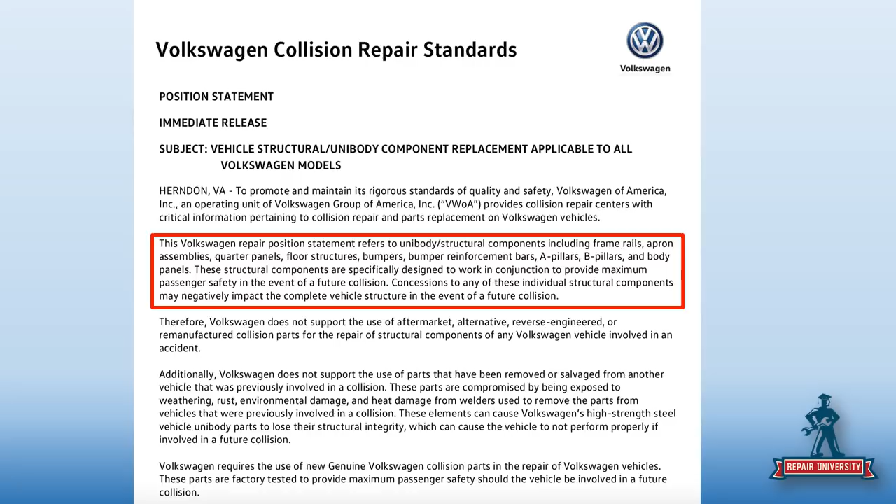These structural components are specifically designed to work in conjunction to provide maximum passenger safety in the event of a future collision. Concessions to any of these individual structural components may negatively impact the complete vehicle structure. But importantly, the bumper works in conjunction with it, and any concession to that can negatively impact the complete vehicle structure in the event of a future collision.

That's a whole mouthful. That sounds like a liability conversation too. It does, yeah. I absolutely love this. And those people that say, well, it's just a quarter panel? No, it's not. Or it's just a bumper? It's just a bumper cover. Yeah, Mark, just a bumper cover, we can do anything we want with that part of the structure of the car.

According to this, this is not only what this repair standard or guideline is for, it's about what parts are critical, and Volkswagen calls them out very specifically. And then this is where it's no used, no aftermarket, no reconditioned. So this is your position statement for that. What I really love about this, and I would hope more OEs begin to get this language, is Volkswagen is very clear that unibody cars' parts are not individual pieces. These companies that reverse engineer a single part, like some company overseas making bumper brackets and claiming they are as safe, it doesn't fit for the way cars are built together and how they interact with each other.

Yep, so great point here. This is a great point to hand to your customers, and it really gets us going. So, unibody alignment and repair. We're going to skip over a couple things. Obviously, we're going to skip full body sectioning.

Well, this is near and dear to my heart, from my previous life working with Hunter and suspensions and all this. Volkswagen suspension, steering, and drive axle components may be constructed of special alloys that include aluminum, nodular iron, and special steel alloys. Volkswagen does not support the use of recycled parts, commonly known as junkyard parts.

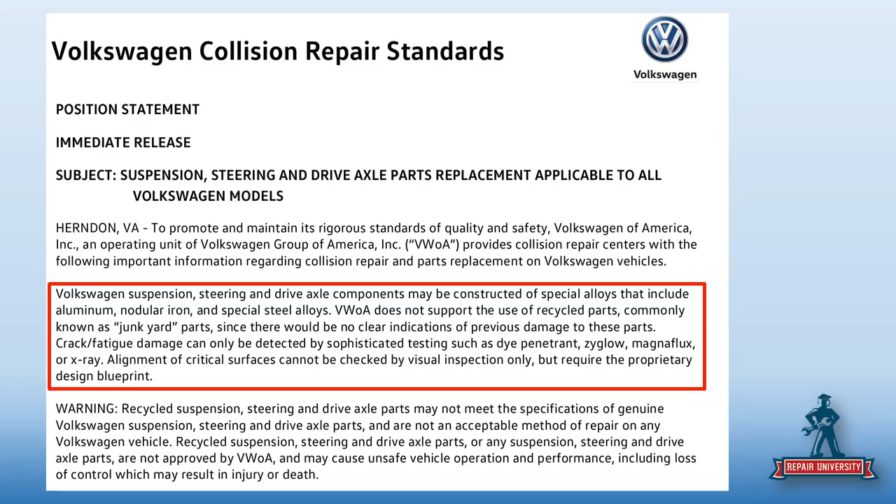It says that since there would be no clear indication of previous damage to these parts, you just don't know what it's got. Crack and fatigue damage can only be detected by sophisticated testing such as dye penetrant, Zyglow, Magnaflux, or X-ray. So what they're really saying is if you're bringing in that used part, we don't know what happened to it, we don't know the history. So we've got to Magnaflux it, X-ray it, just to make sure there's no cracks. Alignment of critical surfaces cannot be checked by visual inspection only, but requires proprietary design blueprints. So if there's any problem with it, and we don't do our due diligence, we don't know what we got. So for that reason, they're just saying don't use them.

If you go back to the February show for Repair University Live, where we did suspension and steering, Larry has a video where the car gets hit in the rear, and you see the front wheel roll forward and then suddenly roll back. You see it hit the curb, not even anywhere close to the impact area, but we know that suspension had a lot of stress applied to it, and the transmission in this case, because it was an all-wheel drive vehicle.

One thing to understand here, it does say dye penetrant, Zyglow, Magnaflux. All three of those are the same. Zyglow is a company, Magnaflux is a company that is also a process. You cannot Magnaflux aluminum components because they're not magnetic. You can only Magnaflux magnetic components. But I can X-ray it. You can X-ray it, yes. And Zyglow and dye penetrant are all dye penetrant, just dyeing something in the area.

Zyglow actually uses a black light. So I just want to make everyone clear, because I hear guys all the time talking about, oh, aluminum parts, I'm going to send it out and get it Magnafluxed. You don't have to send it out, you can do it yourself with 3 different spray cans that you utilize. You cannot send it out and get it tested at a lab for Magnafluxing because it's aluminum. Magnafluxing can only be done through magnetic type testing, so that means it has to be a ferrous type object.

So here's the bottom line for me, the conversation I used to always have, and I'll throw my insurance hat on because I take a lot of criticism, right? You're making more cars total, Kristen, you're anti everything these days. And so here's the part: we never, ever had a discussion in this industry about the use of used airbags, even on the insurer side, right? Do we ever remember? It was really quick if it happened, right, because it was a safety issue. For the love of donuts, I think I'm gonna make a shirt that says just for the love of donuts and wear it around everywhere.

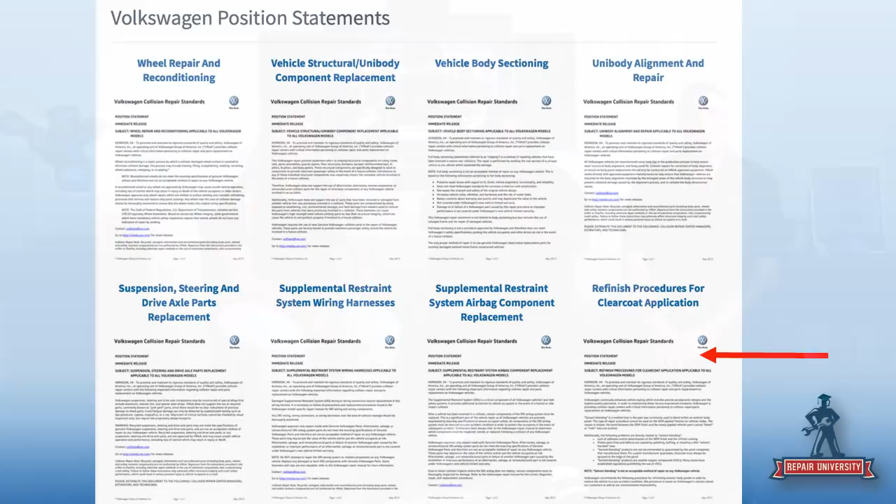So that's really, and kudos, Volkswagen does a great job of explaining this and why it is what it is. It's not just that I want to sell parts, it's that there is damage potential. So let's go on over, because we always know if we go to that airbag section, it tells us not to use these airbags. But let's talk about refinish procedures for clear coat. We have a lot of paint companies that have put out refinish position statements, but here we have an OE that's got a refinish position statement.

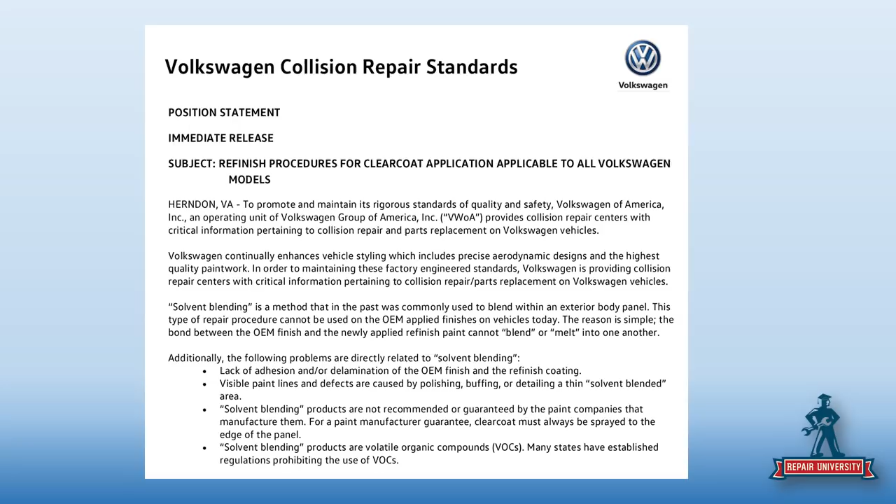The big thing is you've got to go to a panel break. You've got a quarter panel, you go to wherever it breaks, and if there's no roof molding, you might be doing the up and over. So you're painting the quarter panel up into the roof, down to the other quarter panel. They're clear about it, and basically they're saying no solvent blending. Now we have the paint company saying it, but we also have the OE saying it, which is really great. It's a good thing to put together, you can lay those out.

I hear every shop in America right now going, I only want to fix Volkswagens, so I'm going to become a Volkswagen shop. I'll be honest, we do a lot of Volkswagen and Audi that have that up and over, and we've employed them to put a roof molding. We'd rather just take off the doors and the fender and paint the uniside than have to go up and over on every single one of these cars.

We're the shops that are getting paid for every single procedure on it, but it is a little annoying to pay for something you don't have to. When you're certified, you have to take film thickness measurements, reduce enough of the clear coat so when you paint over the top of it, it still comes up relatively the same number of mils so no one can really detect it's been painted. This becomes a real problem - I don't care how much they pay you for it, forget about car totaling, who wants to do that type of work? It's painstaking, and your mistakes are always made on the roof panel or the opposite quarter panel. It's like, oh man, I burnt the paint, or I did this, or I did that.

The average shop that's going up and over - let's just take what an estimating system does, most of them. A blend panel is half the panel paint time, including clear. Well, that's what these fools do. I got it, but that's not your shop, I'm talking about what the industry does. So now we're going to paint the roof for half the panel paint time, the other quarter panel for half the paint time, including clear, and less materials. It's tough to make money doing that.

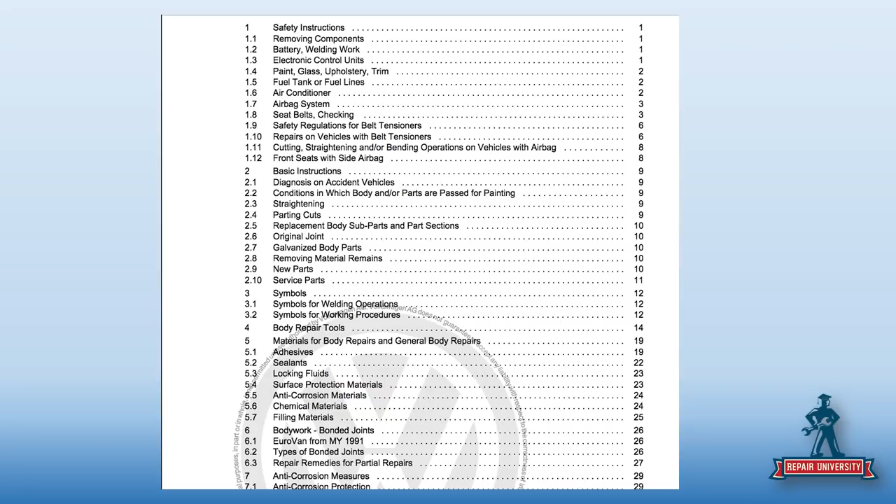Let's get started, because we've got a lot to go through. Here's the table of contents for those 71 pages, and as you can see, it covers a wide variety of content and material. Let's just touch on some of the biggies. Right off the bat, page 1—what's it telling me there in 1.1, Larry?

Before any disassembly work is done, the vehicle should be securely attached to the lift. Wait, so I can't just pull it into the shop, drive it into the corner, and start doing teardown? More than likely, most of the stuff you're going to have to do—even to remove the front bumper fascia or rear bumper fascia—there's plastic covers underneath, so you're going to have to lift the car up at some point.

Obviously, safety precautions. Secure it to a lift, lift it up in the air, drop it down, lift it up, drop it down. It gives you the need to take tires off numerous times to remove splash shields, fenders, or other components. So, is placing...

Wait, no, you're gonna channel Danny. Is placing a vehicle on a lift an included operation? No. No. Well, what would you include it in? Awesome. But I got right here, I haven't even turned to page 1, and I got one thing I should be charging for.

And if it's going to go on and off that lift a couple times, like Larry's analogy on removing a wheel and tire, you may, through the course of the repair, have that wheel and tire off 4 or 5 times. You gotta move that car and get all that charged. So we go down to 1.2.

We're still on page 1, by the way. Mark, what do we have there about batteries and welding work?

So battery and welding work. The first note is about disconnecting the battery to ensure the radio codes. So before disconnecting the battery, Volkswagen's saying write down the radio codes. Well, that's just a good practice. They're saying do it so that we have it back in there for the customer. So that's a customer courtesy.

But then before welding work, always detach both the battery cables, not just the negative, both of them.

Wait, what about my surge protector? No. Can you surge protect? You still got to take the battery out. Well, a surge protector protects the battery, nothing else. We're trying to protect everything else. And by having a surge protector on, you actually leave systems live in the car and you can fry them.

But a lot of technicians say, 'I'll just disconnect the negative battery cable, isolate it, I'm good.' But we got to do both here. And then, if the work produces a spark to be performed in the vicinity of the battery - not next to, in the vicinity - battery's got to come out. So if I'm not welding but doing a little grinding, anything that causes a spark in the area, battery's coming out.

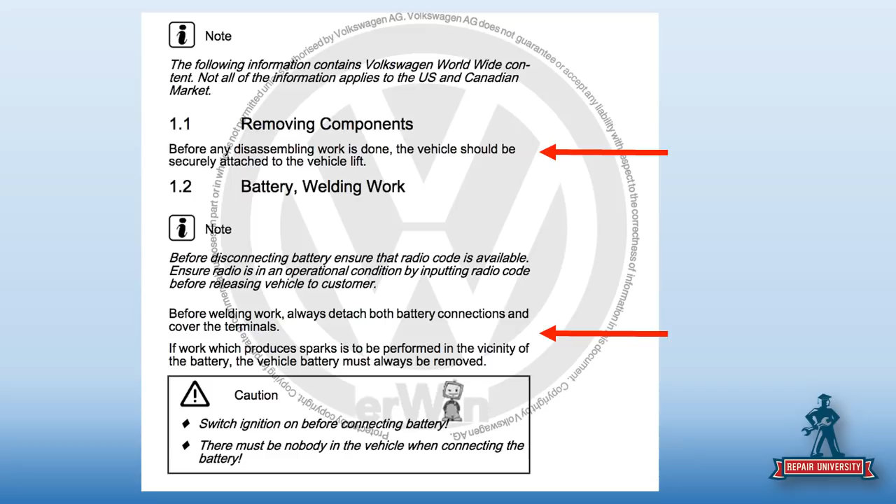That's good to know. But when I go to put the battery back in, what's special about Volkswagen and batteries? So most vehicles say have the ignition off. Volkswagen says turn the ignition on. So switch the ignition on before connecting the battery. And then make sure nobody's in the car, obviously. But that's very different than most of the other manufacturers saying to have the key off.

Yeah. And how would you know all this? If you didn't read the manual. We're just cruising through these 71 pages, and we're on page 1.2 - we've just flipped past the table of contents, and we are there. There's a lot of good information. We've learned a lot just on page 1, yeah, we've learned a lot of what I've done wrong in the last 10 years on page 1.

Now, just like we covered in the blueprinting show on the General Motors vehicle we had in the shop, Volkswagen has some pretty specific requirements around seatbelt testing. And I got a lot of phone calls about that show, by the way. Like, do we really have to do that? Right back to - a lot of manufacturers have that - right here with Volkswagen, 5 pages of seatbelt testing and how to do it. And what does it say about it up there?

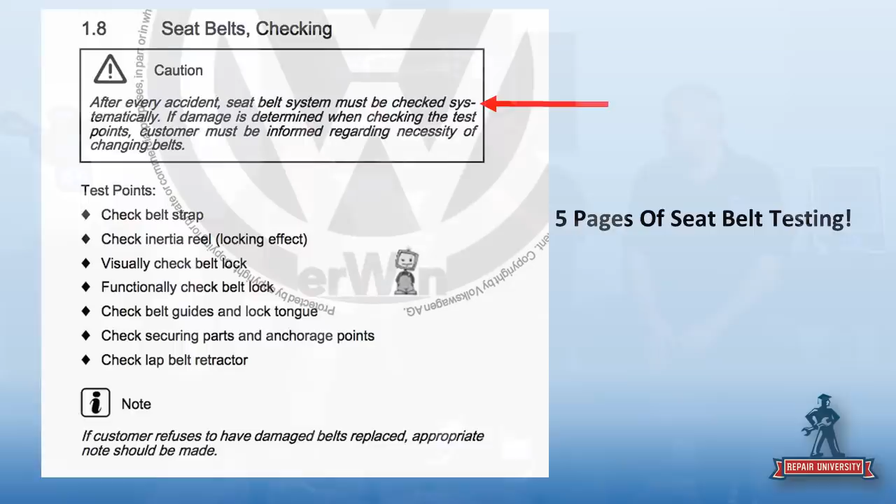It says every accident. Doesn't say minor, just says every accident - seatbelt must be checked systematically. If the damage is determined when checking the test points, customer must be informed regarding the necessity of changing belts. Pretty simple - it says every accident. So you bump up and hit a curb, something minor, that's an accident.

Well, I think another part of this, for people that were calling after that show, is that we need to explain to people the role that seat belts play in airbag deployment. So the reason the OEs have so many pages associated with checking seat belts is because it's a deciding factor in the when, the how, and the what of when deployment happens.

So definitely has to be done. It's not optional. It is 5 pages. It can be a matter of life and death.

Is it included? No. Is there labor that needs to be associated with that? Well, especially when you start having to take covers off and go under dashes and different things as they describe. Yeah, there's labor involved. Absolutely, drive testing. So you need to do drive testing with the amount of people that occupied the car at the time of the accident. Need to get back in the car and go driving around, with a couple people sometimes, yeah. So it's like a lunch run. Maybe, I'm just kidding. Everybody, the dreaded lunch run with the customer car.

All right. So let's keep going through supplemental restraint systems. So we're still in section 1, right? We haven't moved on.

So Larry, what are they telling us about a vehicle that's equipped with an airbag? By the way, do we sell vehicles without airbags these days? No. Most cars on the road, there's very few of them, maybe the Volkswagen Bug from '65. But most of the cars, everything's got an airbag.

So cutting, straightening, and or bending operations on vehicles with an airbag. So that's really every vehicle. Pretty much the shop watching this, this applies to you. What is it telling me, Larry?

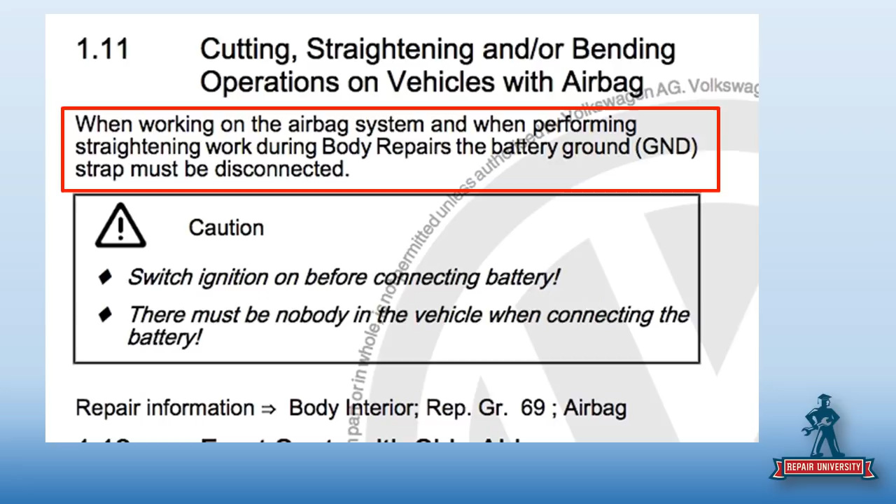When working on the airbag systems and when performing straightening work during body repairs, the battery ground strap must be disconnected. So obviously, Kristen, when I'm going to work on the airbag system, if I'm taking one in or out, then I'm going to do that.

But Volkswagen's basically saying, hey, anything you're doing straightening, whether it's a 2-hour dent in the quarter panel or a 1-hour dent in the fender, you're going to be disconnecting this ground strap. And then once we disconnect it, that sets a lot of systems down. We might have to do some reprogramming, et cetera, depending on the model.

Right, and we'll channel our inner Jake, because Jake's probably at home right now going, I can't believe I'm not on the Volkswagen show, right? Mr. Volkswagen himself. When I disconnect that battery grounding strap, when I disconnect the terminal, that's going to trigger all the ADAS stuff, all the calibration and reprogramming and all the stuff I have to do.

So could a 1-hour dent in a fender end up in a $9,000 estimate? It could, easily. Absolutely, extremely easily. So, boy, are the times a changing.

And that's what we've been long saying, that if you're going to write an estimate, you've got to get to RTS and this site, read all the information so you can include all these things, because you've got to do them. I wouldn't have a photo come in and just put an hour worth of repair time on the fender, paint it, and call it a $900 estimate. We're done. You'll have a $10,000 supplement, and possibly a customer running around in a car that should have been declared a total loss way earlier in the system.

Right, what I love here is where it says where the accident damage indicates overstressing of the vehicle. It doesn't say that I've had a wheel impact or an impact to the component or I've got structural damage. It says that I've had an overstressing to the vehicle.

So let's go back to that footage from February where we get hit in the right rear corner and we see all of that stress go into the vehicle in the front end. I'd be checking the front suspension on that car.

Well, once again, this goes where accident damage indicates overstressing. It doesn't say shows or you can see. Panel misalignment, especially with a lot of these German cars that have open apron assemblies where you've got an upper rail, a lower rail, and nothing on the bottom, can have a lot of misalignment to the structure and still have decent panel gaps. So yes, panel gaps are one way of telling.

Okay, wheel position is another way of telling, but to be accurate, you have to measure the vehicle to indicate or show proof of what actually is misaligned. So you have two different things you're doing there.

Now they also come over, check the steering gear, carry out a visual check for bent or cracked parts, check the running gear, all the suspension parts for any chips, paint missing, misalignment, twisting, anything binding, the wheel straight, one wheel straight and the other wheel's like this. Obviously there's an issue there.

This is interesting, the third diamond down: examine wheels and tires for damage. Sounds good, but they want you to check for true running and imbalance. True running would be basically to see if it's wobbling or if it's oblonged. So you'd have to do two static tests of that and hand spin the wheel, and then take the wheels off and check for balance.

Examine tires for cuts, slits, etc. in treads and walls, meaning the side walls, and check the tire pressure. It's very important, obviously the gearboxes, anything like that.

And here's another interesting one. So we already found out that the manufacturer tells you you have to reset the radio for the customer. Customer resets, right? We also know that someplace in here they're going to tell us you have to reset all the express features and memories, okay? But here's something else they tell you: finally, a thorough road test after repairs will give the assurance that the vehicle is once again completely roadworthy and can be handed back to the customer without any doubts as to its mechanical state.

So they're telling you you have to perform a road test, a final road test or final test drive, to ensure everything works. A lot of times this takes two techs to do: one to watch everything in the car and listen for noise, and another to operate the vehicle safely, because later it tells you not to drive around with your scan tools and everything in your lap.

So we got an accident vehicle that needs an alignment check and a test drive. And there's more than that, and we're only on section 2. I can tow a car out just for this stuff right here. This is section 2 of a 71-page document.

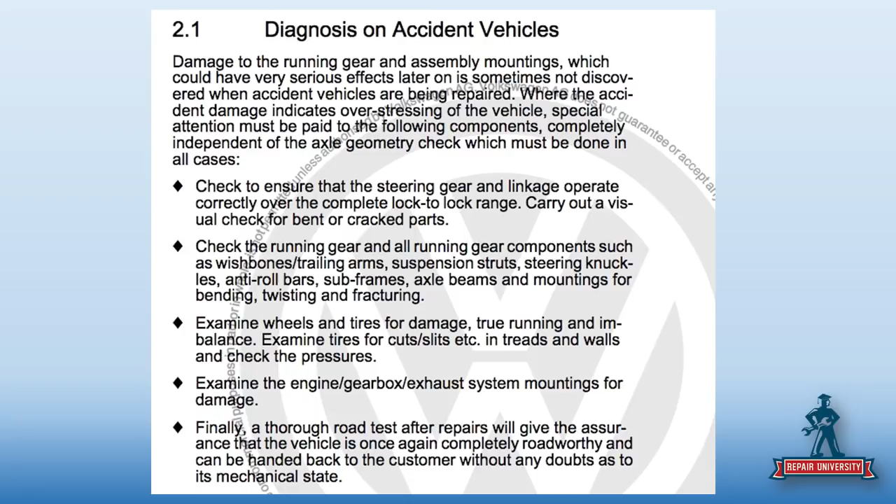Now I'm going to get down to here, and I now know I've got to do a pre-measure. Is that included? Nope. I've got to do a pre-alignment check. Is that included? Nope. And then I've got to do all of these things - runouts, tire, which Larry shows in that steering and suspension show. It's available on YouTube, you can go back and watch it right now.

But is any of that included? Not that, right now - wait till after the show. Yeah, that's a good point. Or you could just pause us and go watch it and come back - the power of YouTube, right? But is any of that included? No.

So when I talk about how just these 71 pages alone completely added a lot to the estimate, that probably put you at about 12 to 15 lines on your estimate. And we found out we have to do a road test, and we found out we have to reset the customer radio codes and conveniences - doesn't even talk about the clock yet. Wait, on behalf of Danny, Mark, is that included? No. All right, well, there we go.

So let's go to 2.3, straightening of body panels, basically, is what it says here. Mark, walk us through this one. So bodies and floor sections are produced mainly from cold-formed, deep-drawn metal. So I-CAR, and this isn't new, but this is just really weird - it's just black and white here.

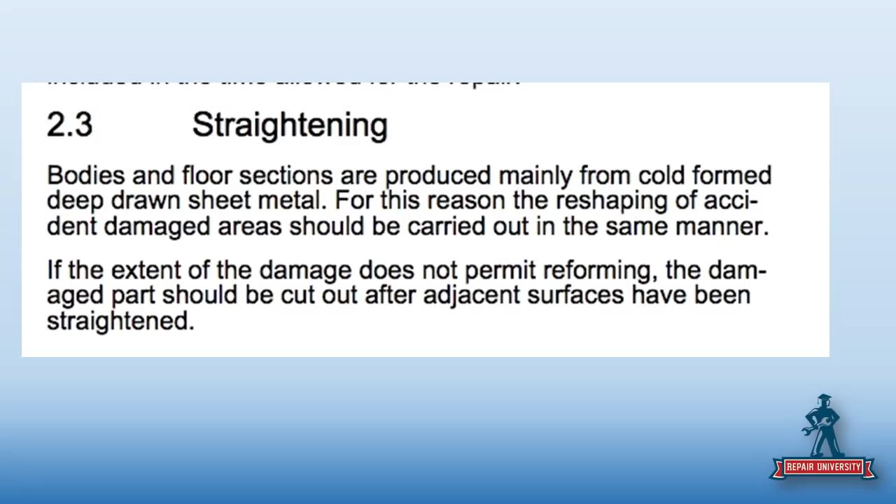For this reason, reshaping of accident damaged areas should be carried out in the same manner - cold straightening. If the extent of the damage does not permit reforming the damaged part, it should be cut out after the adjacent surfaces have been straightened. So if you can't straighten it back to the same state and shape so it looks the same, cut it off. It's not hammering it out to look like a pizza and then slathering it full of filler, or just leaving it raw - some people don't even do that.

Undercoating - so for a rear body panel, if I can't get it back to just the way it was, cold straightened, without filling it full of filler, what do I do with that rear body panel? Cut it off, put a new one on. If I do that with a floor, what do I do with it? Same thing. There you go. So we're not just slathering it in to make it look good - these are body structures, and cold straightening.

It goes back to that statement before, where Mark's going to kill me for saying this - Volkswagen basically says these panels have a purpose, and they all work together, and all of those designs and conjunctive - I don't want to say deformities, but impressions and convolutions that you see in those panels are there for a purpose. It's redirecting energy.

It's not just because they wanted a place where water would gather in the rear of a car, right? It's critical that you get that stuff back right. If you can't get it back right, just put a panel on there. It's not about being a craftsman or having 30 years of experience, or being a metal guy versus a parts changer. It's about the car working together in unison. The only difference between two repairs is what you choose to do for free. There's only one way to fix a car correctly, and then there's what you want to do for free.

Let's get to section 3 since we're moving along on the 71 pages. This guide, in section 3 in particular, is where you find all the symbols. So when we get into the repair procedures and you're wondering what the circle, the slash, and the squiggly lines mean, here's where it is.

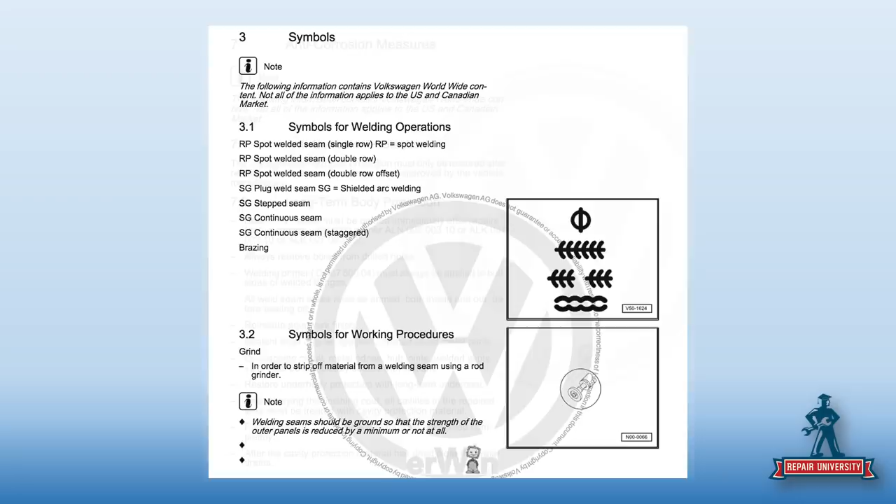Now skip on down, because we'll skip through. Section 5 is where you get all your parts information for all your materials — your seam sealers, your adhesives, your body fillers, your screws — everything that's going to go on a car in a Volkswagen repair is listed here.

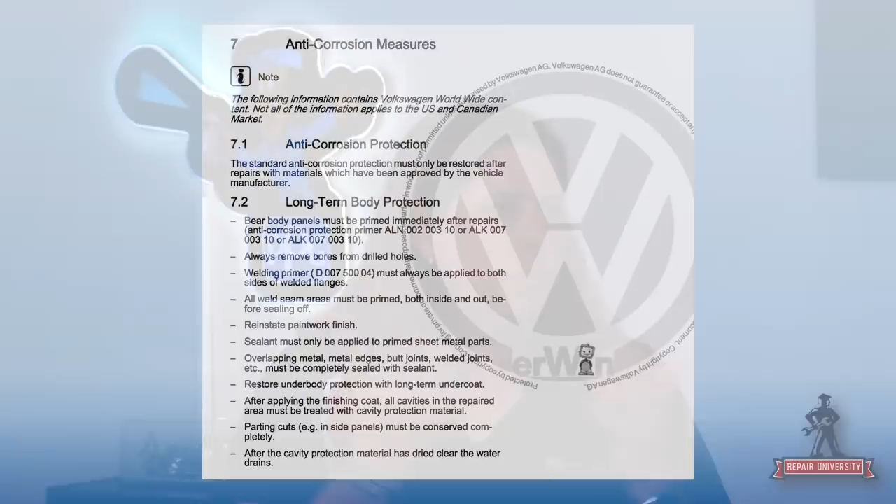Section 7, corrosion protection. They have a very good detailed list of corrosion protection procedures when you do it, right? So always remove burrs from your drill holes, deburring and stuff — wait, is that included? Oh, there we go.

Welding, weld-through primers on both sides. Mark, you particularly love this seam sealing position that probably everyone needs to know about. It's been said for years, but a lot of technicians say, well, I'm going to put it back the way it was — you can't. When you put a quarter panel on, at the factory they dunk it in E-coat. I've never been in a shop that has a pool they're dunking cars in. So the only way to protect it from water getting to the welds is to seam seal. We have to seam seal all the welded seams, whether they were sealed from the factory or not. It says all seam welds must be primed both inside and out before sealing off. We got to seam seal it. Period.

Sealant must be applied to primed sheet metal areas. You can't just make a choice to use direct-to-metal sealer — no, you can't. They tell you no. They want it primed, probably abraded, but primed.

The guy that sold me the stuff said it's good. Yeah, nobody cares what the guy who sold it to you says. I love when people tell me that. Okay, I'm giving you education, I'm telling you what the manufacturer says. Yeah, but the guy who sold it to you is making money on it. I'm not making a dime. I'm an idiot, you know what, I'm hanging up the phone unless you pay me $1,000 — because apparently you only think something has value if you're paying for it.

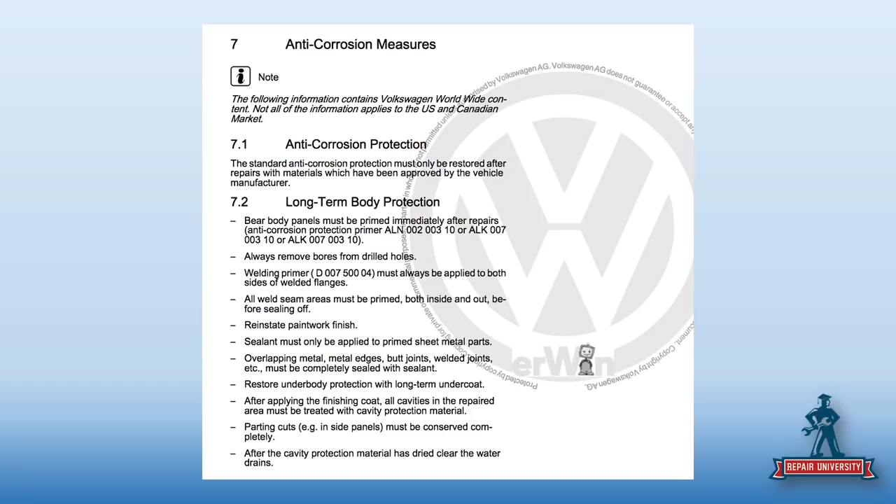Then after we go through primer and overlap all our joints, we're going to do seam sealer after we've done all that. And then we're going to put cavity wax back there. What I really love is at the bottom they basically say, hey, don't forget the drains before you deliver the car. Cavity wax isn't the last thing you do as it's driving out for delivery.

You got to let it dry, and then you got to clear the drains to make sure the car's okay. Keep in mind, if you're doing the bottom edges of doors and the car's back together, just have the battery disconnected, leave the car doors open overnight, and probably put some paper or cardboard on the floor and let it drip out overnight. Because if you come in the next day, you're probably going to have it all over your fresh paint.

So you don't want to have that happen. That's one of the mistakes a lot of people make, they just spray it in there. They really want it to drip out the weep holes. The whole idea is it's supposed to move. It's a viscous material that starts off a little more liquidy, and as time goes on it gets thicker, but it's supposed to creep into all cavities. When you first spray it on, it's very wet and moist, so it'll really creep into these areas. It's going to drip out those drain holes or weep holes, and get on the side of unisides or rocker moldings, and leave huge, massive stains in fresh paint.

But the problem is, once a car's painted, it's supposed to leave 10 minutes later. That's the problem with most of these shops, we're pushing it like it's on fire out the front door. So all of this corrosion protection is not included. Not included? No, all those things that are coming up.

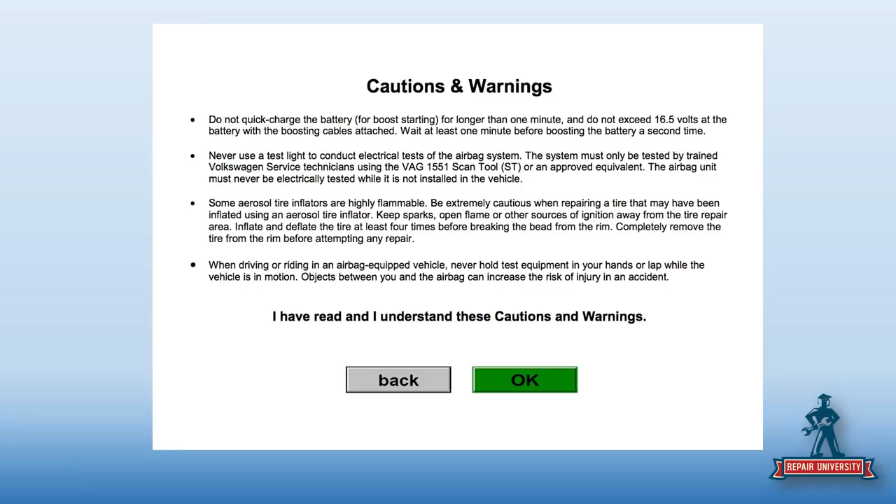Well, it's really awesome. When Larry showed it to me, Larry's the guru of this site, but you pull up the document on the internet and it goes to the last 3 pages of the document. Now logic would say, let me scroll up to page 1. You can't. You have to read those 3 pages, agree to it, and then it'll let you go back to page 1. You're like, okay, I'll bypass that, I'll just download the PDF. You download the PDF, you open it, it pops up and says you have to be qualified to be doing this repair, and then it takes you to the last 3 pages you have to agree to, even in the PDF.

It's brilliant, there's some great information here. You read through the 3 pages, my favorite is bullet 1: if you lack the skills, tools, and equipment or a suitable workshop to do any of the procedures described in this manual, don't touch our car.

It's just simple. And what's funny is Volkswagen's saying this to manufacturer, and I get yelled at all the time when I say that on a Facebook post, like, you know what, maybe you should send it to a shop that's better equipped. I've been doing this for 30 years.

Okay, nobody cares. And what's funny is there's an almost similar statement when you first open a PDF, before it even shows you these last 3 pages, it'll actually have a thing that pops up: all repairs should be performed by a trained, educated technician.

And so it goes back to this, but if we go back for 1 second, point out another one. 1, 2, 3, 4, 4 down: anytime the battery has been disconnected on an automatic transmission vehicle, it will be necessary to reestablish the transmission control module basic settings using the VAG 1551 scan tool, although they do have equivalent tools that can be used.

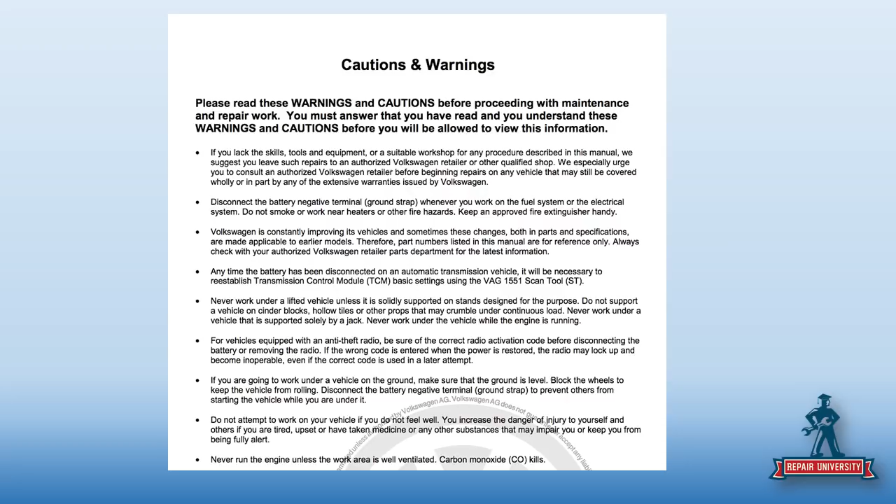Well, go back, because I like the one right before that. So it says, do not attempt to work on your vehicle if you do not feel well. You increase the danger of injury to yourself and others if you are tired, upset, or have taken medicine. That's a lot of people in our industry. Or other substance that may impair you or keep you from being fully alert.

I do love this, just have to say that, right? I know, I do love this document, and I do love the fact that you have to certify it.

So here's my thing that I always kind of get on my soapbox about. If I, as a repairer, want to look across the aisle to the insurance industry and go, I am the repair professional, I'm trained, and I deserve to be paid according to that, then sometimes it means I'm not always the one that fixes every car, right? Exactly. My ability to stand on that and ask to be paid means that I have to know when I'm not qualified and I have to pass on the car. And if I'm not willing to pass on that, then how do we expect anyone across the aisle to feel accountable over anything other than what's an industry standard, right?

I mean, the days of every shop fixing every car... Yeah, I'm just not qualified for every car. Just am not. It doesn't mean that my 30 years of experience isn't worth anything. My brothers, my dad, none of us. It just means we're not qualified for every car, and that's okay, right? Some things we can do and some things we can't.

All right, so let's go back to the page where we started our search, right? So we did the body repair and body collision repair manual. Now let's get into the body repairs. Well, that's where I'm going to find all my repair procedures and information.

So back to our Jetta, 2015 or newer Jetta applies to this. The repair manual for that Jetta is 350 pages. That's a little much, right? It's not the 71 pages. We're not going through all that. We are not. So the bottom line is we can't tell you and show you everything you need to know about how to fix every car.

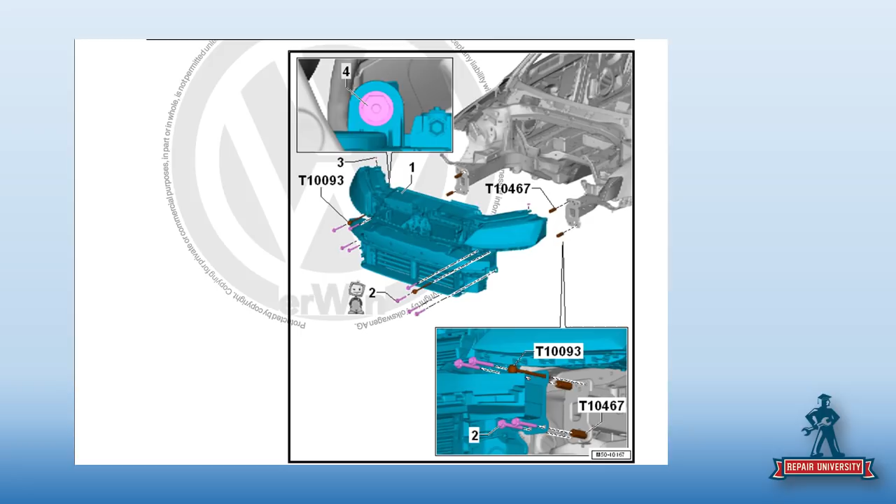At the end of the day, you are still going to need to get in there, research the operations that you're doing, pull the procedures, learn how to read the legends, and find it. And so just a little short graphic example here of some of the things that are in the Jetta manual. They'll show you where the bolt locations are, which is an assistance. They'll show you where spacers might be, or washers—you got 4 different washers, where do they go? And they'll give you torque specs also on a lot of this stuff.

Yeah, so that's really important on the exterior, where it says exterior versus interior. Exterior will give you how to take the bumper cover off. Now you're in the body repair, so you're going to learn where to take off the front module or front cross member, which is your radiator support basically, which is usually a composite material. Just lots of information in here.

And so, like we said, it's each and every car, each and every time. How I fix a Jetta is not how I'm going to fix an EOS or a Touareg, or a, what's the van?

Ratatouille, whatever. Did you just call it a Walt Disney movie? The names they come up with for these cars, it's like, can we just call it Steve? Can we have a car named Steve and Frank? That would make me happy.

I can't assume every car is going to be the same. I've always got to pull the repair procedures for it. Volkswagen has a great video available from Volkswagen Ireland that takes a Jetta, basically a 2015, and fixes it with the repair procedures and recommended equipment that Volkswagen said to use. Then the next year the body changes, so they come out with a 2016 and fix that car with the 2015 repair procedures, then crash test them, and it's a catastrophic difference. So even following an OE procedure from the previous year isn't always the best thing to do, just because they look the same.

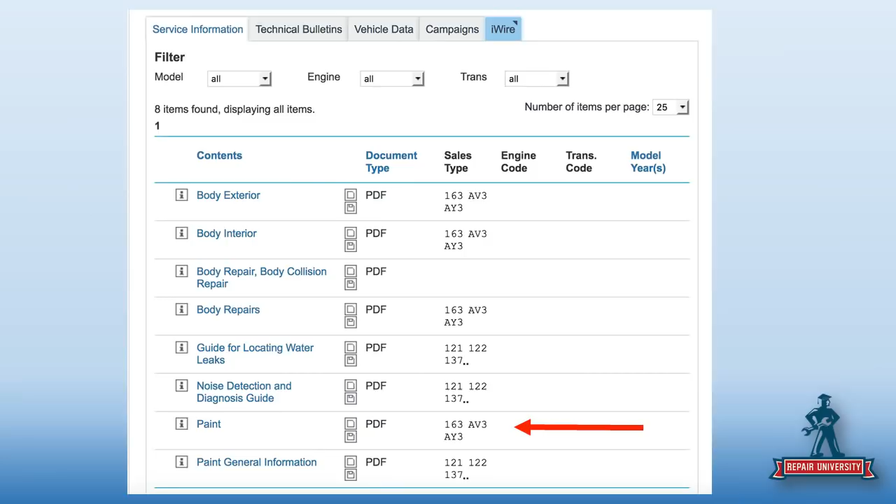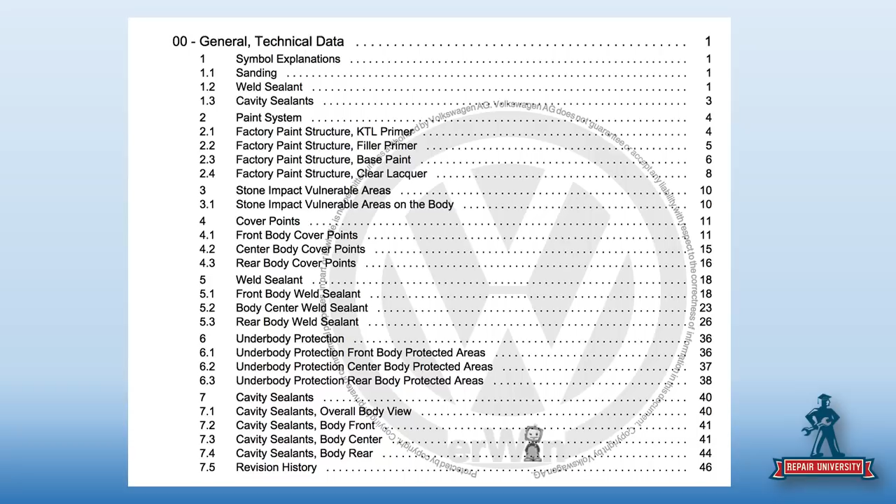Now let's go back to this thing. So, paint information - what could I possibly need to know about paint when it comes to a Volkswagen? Well, our friends at PPG go, well, you need to know everything about paint, Chris. What's really interesting, and why we want to talk about this, is that it says paint, but it's not just paint. It's basically coatings. Anything considered a coating is what's in this document - my primers, my seam sealers, my underbody protections, my cavity waxes, all of the details on that.

So our general guideline said, hey, dummy, do it. This document tells me where, how, and what I'm going to do. And it's 50-something pages long just on that. Walking through it, just so you get an idea: impact-resistant primers.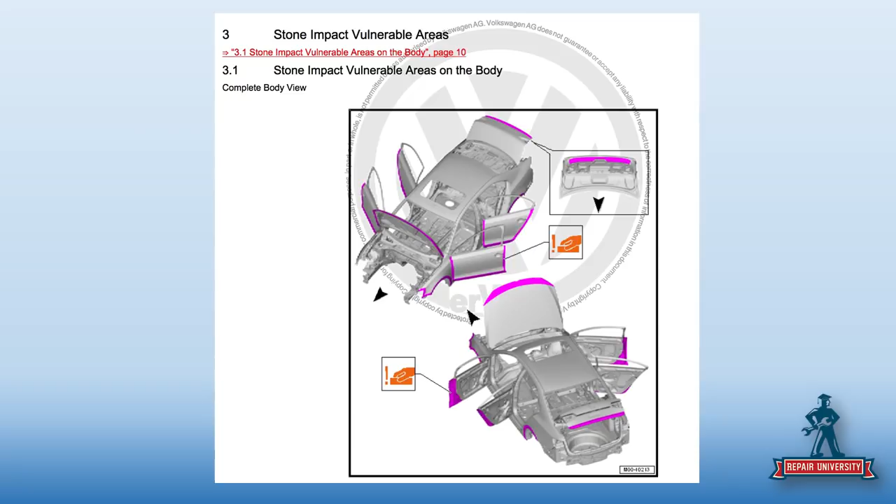But the stuff on the hood and the trunks, well, you don't see that, can't even see it. Now, when I replace those panels, does that stuff need to go back on there? Yeah. Is it included? No. Oh, there we go - so there's more information there.

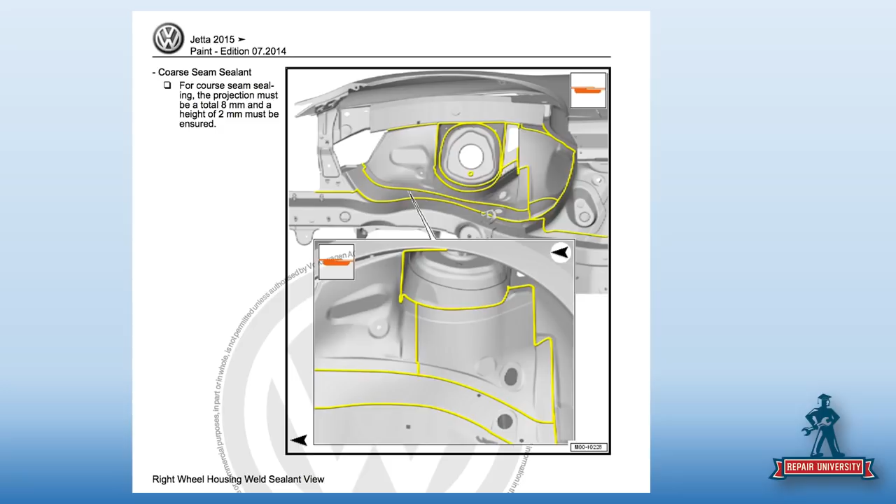There's our guide to seam sealer, what they consider the coarse seam sealer, which is what you'd probably find on the apron, or on the rear and floor pans and rear body panels. It tells me where it's going, how thick and how high. A lot of times the best thing to do is take a cardboard box, and whether you're spraying a heavy spray or using it as a regular pump, you can pump into the edges where the corners meet up, the 90-degree angle, and use that to gauge and adjust your gun. But that practice of seam sealer application is not included - that's process, not included.

Taping off - so here's another thing. There's one estimating guideline that says the application of a seam sealer is included.

It does not include all the taping, just standard factory application. So not all of it. All seams, wherever they put it, that may be included, but what's not included is the material and all the seams that weren't seam sealed from the factory.

We have sprayable seam sealer now because it tells me to, since we have to seal everything. But sprayable seam sealer doesn't get included in that. The DEG actually has an inquiry that went over all three in an article if you search the DEG website.

If you watch, there are great seam sealer pictures out there, from Keyshawn in Maryland. Great technician. He shares every time he's doing seam sealer, all the time and energy he spends laying out the masking tape, beautiful stuff, having the perfect space for the millimeter of width and everything that he's doing. That's not included, and it all needs to be labor time on the estimate because it's all got to be replaced, plus material, setup time, matching factory texture.

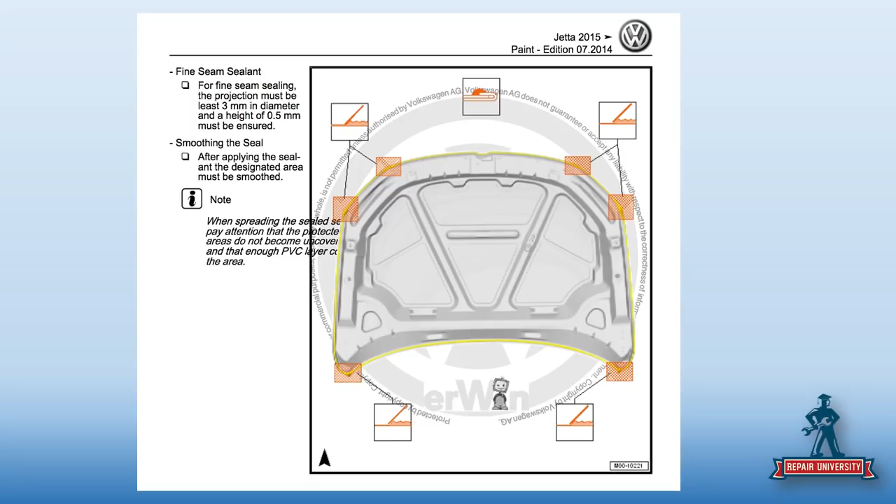None of that stuff's included either. So there's a lot in here, but I love it, it tells me exactly what I have to do. I'm also going to have to seam seal new parts when I buy them, doors, hoods. Volkswagen has an outline and tells me where it goes, how it goes, I have to have it smooth, again width and height of what I can have on that. It's very specific, all the information I need is here.

The reason why a lot of technicians say, well if it didn't come out of the box with it, it probably doesn't need it, is because if they put a hood on a car, they seam seal it on the car as it's going down the assembly line. That hood never got to that part of the production process to get seam sealer, that's why it's not there. So we have to put it on, and that's not included.

And then, after I seam seal it, I got to go back and apply cavity wax to doors, hoods, trunks, all these areas where I'm replacing parts that need cavity wax after it gets out of paint. In this refinish document, you will find the where, the dimensions, the how, and the what product you need to be using.

It's really critical what you just said, after paint. So now the body tech, it's got to come out of the paint department to the body tech, they're going to put it together. We got to put this stuff in, and then we have to let it dry or be in there long enough so that it's not dripping out when the customer picks it up. We got to be planning this into our process and putting it in there.

If I'm painting these things on stands, they're going to stay on stands. At the bottom of the door, they tell you your X equals 10 millimeters, so the height of it is 10 millimeters - that's 10 dimes piled on top of each other if you think about it, that you're spraying on that whole bottom. They want a heavy, heavy coat put on the bottom, so that stuff's going to drip a lot until it starts to cure up.

That's why you should really spray it as soon as it's done being painted and the paint's cured enough that you can apply material. While you're putting the door together, spray that stuff in there first, at the bottom edges of it, because it will drip out until it starts to cure up.

Maybe a situation is this is where we want Sean, our cavity wax guru, and Dennis to come join us. But I may have to tape my holes to prevent draining, let it cure up to the depth that I need it, and then clear my drain holes. I've got some work there.

And wait, is that included? No. So when we talk about the average technician in a shop, they should use at least a can a week. So when everybody tells me they're a great technician, I don't even have to come look at your work, I can call your jobber and find out how many cans a shop with 10 technicians is using.

How many cans of cavity wax have you sold to them? One every 6 months? Right. You can tell they're not doing it right. That tells you whether you're a good technician or not. I don't even have to come to your shop.

So we just say, document it. They don't love their customer. Don't love your customer - that's what it really comes down to, Mark. If you love the customer enough to put the car back the way they bought it and ensure their safety in the future.

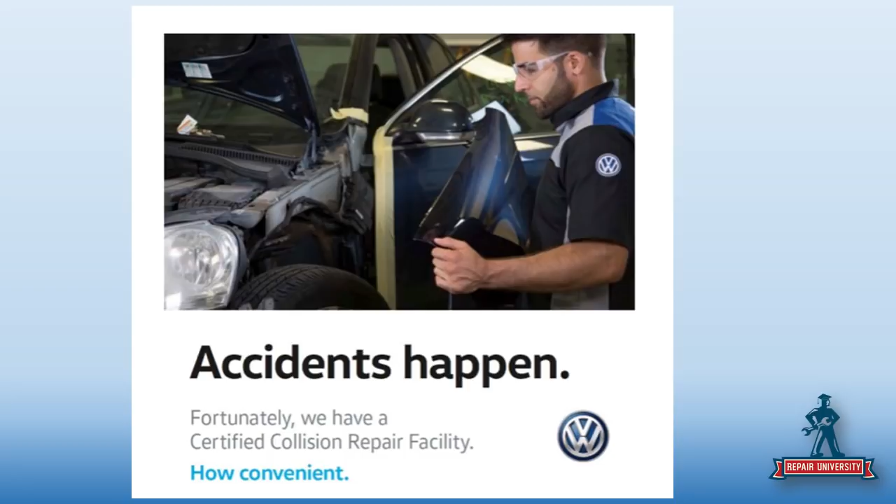They have an entire document, there's that video, on what it takes to be a certified shop. But then they have this entire document on their certified collision program, what the basic requirements are, what it means, and what you have to have. Those requirements are well beyond equipment - there's a lot of things important to Volkswagen from the time the customer hits the lot. So an important document to cover.

If you are sponsored, then you are available for some Volkswagen training. Here are some of the training classes currently available through Volkswagen. There is the cabriolet class, there is a Volkswagen body alignment and structural repairs class - they need to be taken in the same week, so you can't split those up. And then there is Volkswagen collision welding, which is a prerequisite to take the Volkswagen welding expert class.

Notice it doesn't say welding professional because, as Larry says, we're not pros. But what's nice is the cabriolet class basically covers all the Volkswagen convertibles. That's really what it concentrates on - the roof assembly on that, plus other similar repair procedures amongst the cars, because a lot of Volkswagen's repair procedures are similar amongst the cars.

This is the only OEM I know that actually has a body alignment class. You actually go there and pull cars, learn how to pull cars, and then also the structural repairs, so now you have an overall range of the vehicles. The structural repairs are, once again, very similar - the sectioning joints might be in different locations on a few different models, but basically it's all the same process.

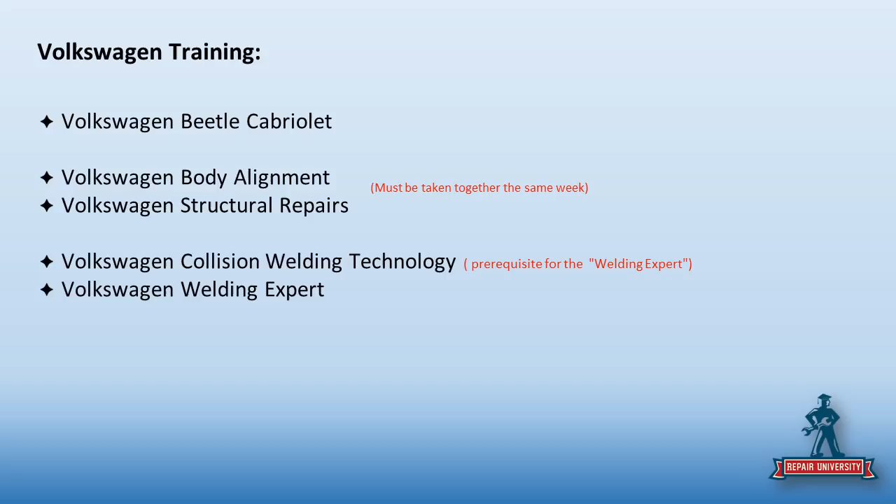Porsche is a little bit different because they have a lot of aluminum mix, which goes into also the aluminum mix with Audi that now has their hybrid construction vehicles. Their welding technology - this is the only course I know that does silicon bronze from the OE, because they use a lot of silicon bronze, as opposed to Audi that doesn't use it. They have a lot of that, so they'll do silicon bronze, resistance welding, and MAG welding - they're going to do all three with you at this training.

And Warren Barber, who runs it, is a former welder himself. Besides being a repair technician, he had done AWS welding also. Warren really knows a lot about welding, tests the machines, goes over the machines, and shows you a few different tricks and tips. We actually even grind or dress silicon bronze welds to see what they look like when we're done.

And then you have a little bit harder course afterwards, the welding expert, which is really nice that they're having these courses. I know they had some other courses that have actually been sunsetted that we've taken, and now I'm sure they'll add new courses as the new models come out. So if you are at a dealership, obviously you can get this training.

And I've never had a tech go to an OE training and come back still set in his ways. I've always had a tech go off and come back and go, wow, they're changed. I did not know what I didn't know.

Going away for hands-on training is one of the smartest things that can possibly happen. That's why we do it with some of our classes. Besides doing them online, we have people come away and get away from the shop, mini vacation, whatever, but you get a better understanding of what's going on.

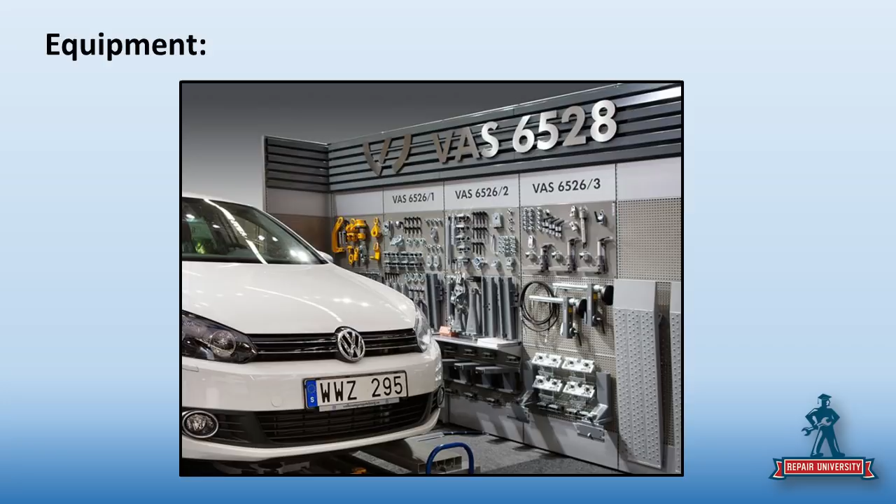Obviously, if you become a Volkswagen certified center, you're going to have some very specific requirements of equipment that you have to buy. It has to be that VAS equipment. You can't substitute or whatever. But let's face it, not every shop in North America is going to become a Volkswagen certified repair center, but they are going to fix some Volkswagens.

So here's what we tell shops: when you're deciding what equipment to buy and purchase in your facility, let all the salesmen go away. I have my preferences, Larry has preferences, Mark, you probably have equipment you like. Let all of that go away. Look at the book of business you are servicing on a regular basis, and then go find equipment that fits as many of those OEs as possible, and that you're going to be able to grow with.

So real quickly, we'll go over some of the certified equipment in the program. Obviously, there are several welder selections that you can have. From what we could gather, looking through the procedures, pretty much every OEM prefers squeeze-type resistance spot welding wherever you can reach, and if you can't reach, there's some other options. So there's a Tecna, Elekton, Wiedlander Shill, Carliner, and GYS.

But you have to order it through Snap-On Equipment Solutions if you are going to be a certified collision shop. But if I am a shop that I know, hey, I'm not going to become a Volkswagen certified shop, but I do fix a few Volkswagens every year, and maybe I'm trying to decide - my welder selection makes sense to buy this one because it works for this. So how many times do we see on Facebook a week going, hey, I need to buy a spot welder, which one of these two do you like? And our response is, well, what are you fixing?

We all have one that we like better than the other - the i4 was like the wonder welder, and we loved it, right? But if it's not on a lot of the OE programs, you have to realize eventually you may not even be able to fix this Volkswagen or some of these other cars because of parts restrictions, type of construction, or even where some of these companies are now on leases or finance through the OEM bank, like Volkswagen of America Bank financial services - you might have to bring it back to a certified shop only. So you might see less and less of these cars, almost where it's like a DRP system. Well, it is a direct repair system, just not run by insurers.

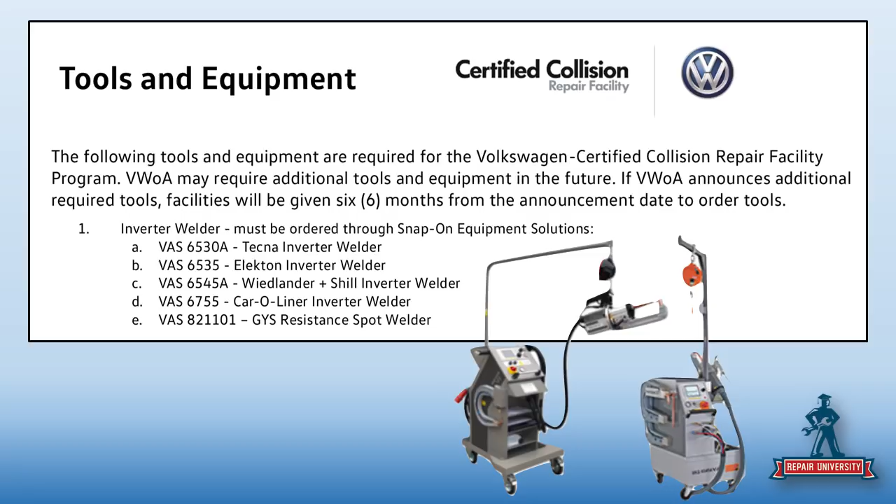Yeah, but these are the things that we ask. But Larry is correct in that I love my CTR 12,000, it's a fantastic welder. But if I have it in my shop, and if I wanted to go be a Volkswagen certified shop, I can't be on the program with it. I'm going to have to buy it through this VAS program - it's going to have to come to me in gray instead of blue, and then I'm going to have to use it on the car. And even with these selections, if you're in an area that sees Volkswagen, you might be in an area that also sells Audi, and you might start seeing them.

Now you really have to think through and say, well, if I buy one welder, it may not be on Audi's program, you know, it's under the Volkswagen Auto Group, so you might have to really think. I really didn't want Larry's welder, I wanted Kristen's welder, but Mark's welder is the one that's on Volkswagen and Audi. Oh, and look, Mercedes-Benz also approves all three welders, but Mark's the only one approved by Audi, so guess what? I might have to go with Mark's.

Even if you don't like it. People call me all the time and go, well, what welder do you like? Don't ask me that, because I like Car-O-Liner, right? But that doesn't matter what I like. It matters what you're fixing and what's coming into your shop, and then you choosing the best piece of equipment that covers all of those brands.

So if I'm fixing Toyotas and Hondas and some Volkswagens and some General Motors, I need to find a piece of equipment as an independent that covers the broadest range, because I can't just pull out any welder and fix the car when it comes in. I got to make sure.

The last time I checked, if you're on every single certified program, including the very restrictive ones, you'll need a minimum of 2 resistance welders, if you're starting right now. Some of the stuff is grandfathered in, so you could probably pass it, but I'm talking start up tomorrow. I could get sponsored by everybody. You're looking at 2 resistance welders and at least 2 different aluminum MIG welders, and at least 1 MIG welder for silicon bronze. So you're looking at probably $100,000 in just welders right off the bat. And that's to be on every single one of the programs, just because of the overlap and non-overlap between companies.

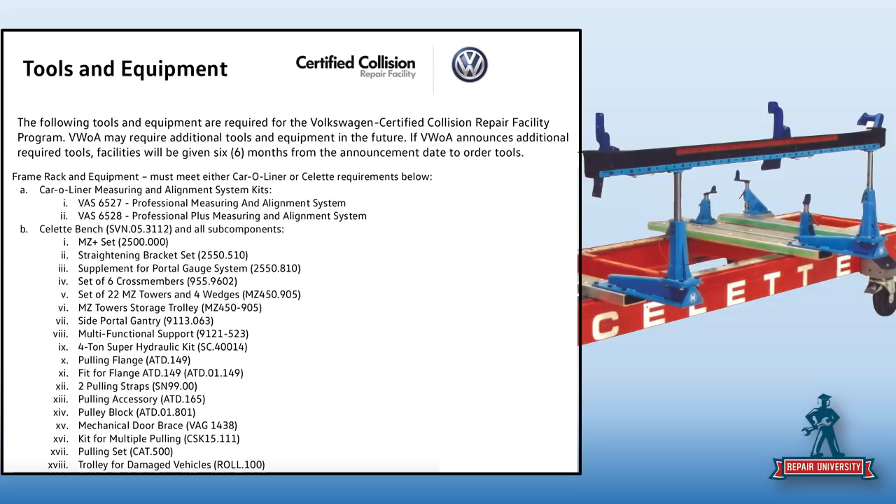Yep, it's done. And so just to hit the majors, obviously welders are big, and then we spent a lot of time talking about how much Volkswagen wants their vehicles in fixtures and on the benches, right, and being held. The 2 systems that we use here at Collision Hub are on the program. So between Celette and Car-O-Liner, you are covered. There are some other systems that are on the Volkswagen approved program, but for here it was good for us to know that, hey, what we've got back there gets the job done.

You can fix Volkswagen. So again, just like with welders, if I was going to make a purchase decision on a new bench, new rack, new measuring system, new whatever, I would go look at the OEs and figure out which system gets me the most bang for my buck. Doesn't matter what I like. Obviously, I like Car-O-Liner and Celette, and it works, but I tell people, don't ask me what I like. Just go find out what you're working on and pick the best piece of equipment that works for you.

Well, guys, like I said, it was about an hour and a half, and we didn't even really get into procedures very much at all. We just covered the basics on that. So there is a lot of information. I do truly believe that everything that we're hearing around the industry lately at all the events is that shops are going to end up with nothing but a position of a research person. That's their entire job, is to research every repair. Research and scan.

And then brief the technicians on what the processes are. But the techs are really going to need computers at their particular area, and be able to have access to other information they're going to need. And repairs have to slow down. Yeah, repairs can't be done that quickly, and that includes...

There seems to be a lot of wasted time at the beginning because nobody really truly knows how to run a shop correctly, and then getting it into work process. Then all of a sudden, okay, we'll give the frame guy a little bit of time to get this done, and as soon as the framework's done, bodywork's got to be done in half a day. It's got to be primed that afternoon and already be ready for tape.